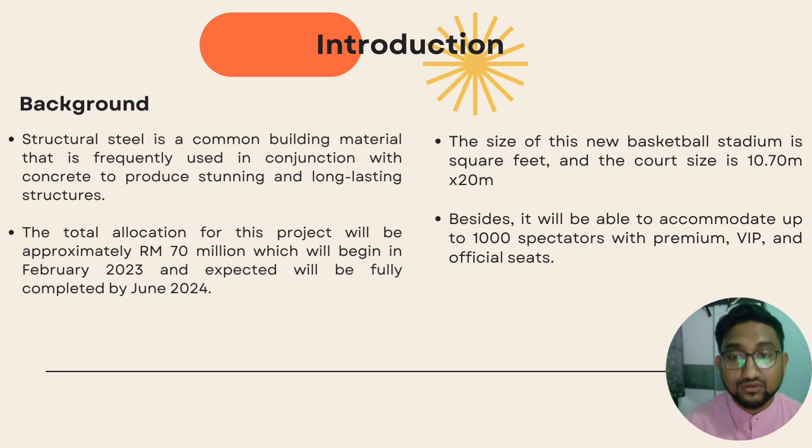The size of this new basketball stadium is in square feet, and the court size is 10.7 meters by 20 meters. It will be able to accommodate up to 1,000 spectators with premium, VIP, and official seating.

For the next slide, this illustrates the proposed design for our basketball stadium, and beside it is the project detail. The project title is Basketball Stadium in Georgetown, Penang, located in Georgetown, Penang.

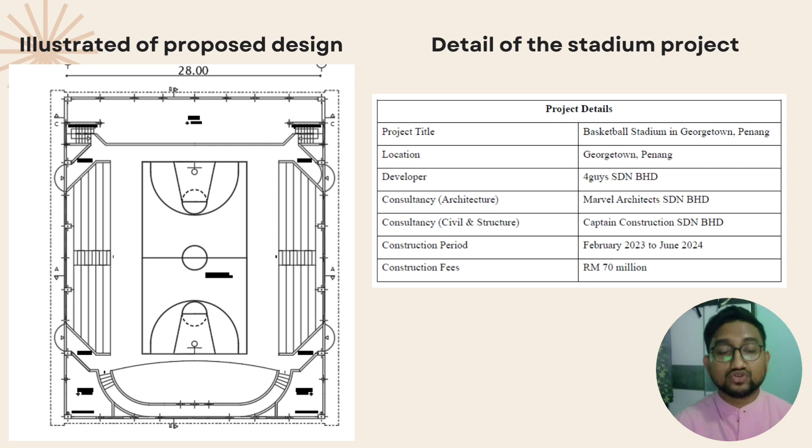The developer is Four Guys Sdn Bhd. Consultancy for architecture is Marvel Architects Sdn Bhd, and consultancy for civil and structure is Captain Construction Sdn Bhd. The construction period will be around February 2023 to June 2024, and the construction fee is 70 million ringgit.

For the truss design, a truss, often known as an open web girder, is a triangulated structure of straight interconnected structural parts. The different pieces are joined together at nodes and are frequently considered formally pinned. A space truss can be determined when contrasted to planar trusses, where the members and nodes are positioned in three dimensions.

For the form of truss, the shape chosen is the Howe truss. A Howe truss is a type of truss bridge made up of chords, vertical and diagonal members, with the vertical members in tension and the diagonal elements in compression. As a result of the longer diagonal members, the Howe truss requires less of the more expensive iron material.

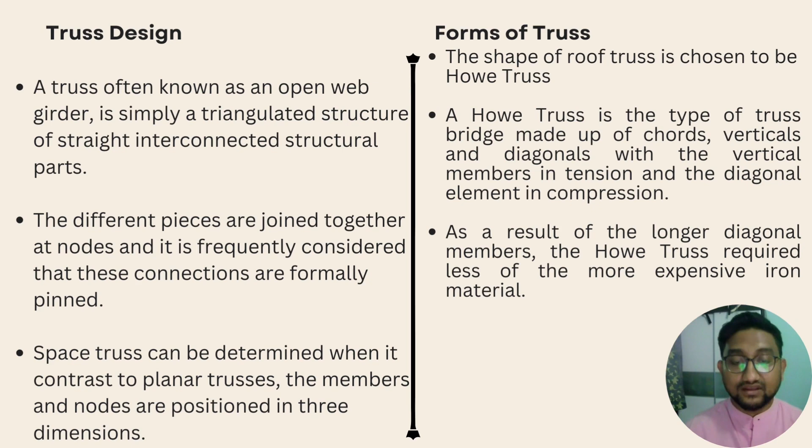For engineering judgment, as for the truss member, two main components are involved: the rafter and the purlin. Rafters are wood beams that incline upward from the ground. Purlin is a horizontal beam or bar used for structural support in building, most commonly below the roof, where purlins are held up by the rafters or the wall of the building.

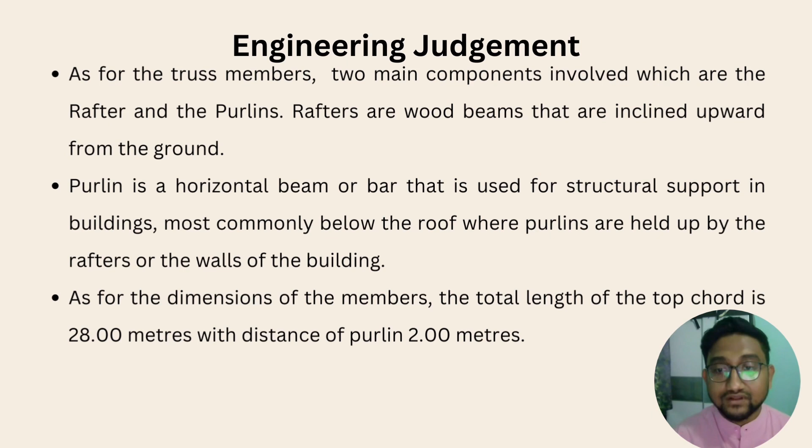As for the dimension of the members, the total length of the top chord is 28 meters, with the distance of purlin being 2 meters. Assalamualaikum, my name is Nalai bin Chandraza, my matrix number is TF200144.

I would like to explain the design overview for Chapter 2 of our project. In this chapter, all the drawings involved are simplified without changing the existing design. This chapter aims to make the designing work easier, and all dimensions and sizes are also shown clearly.

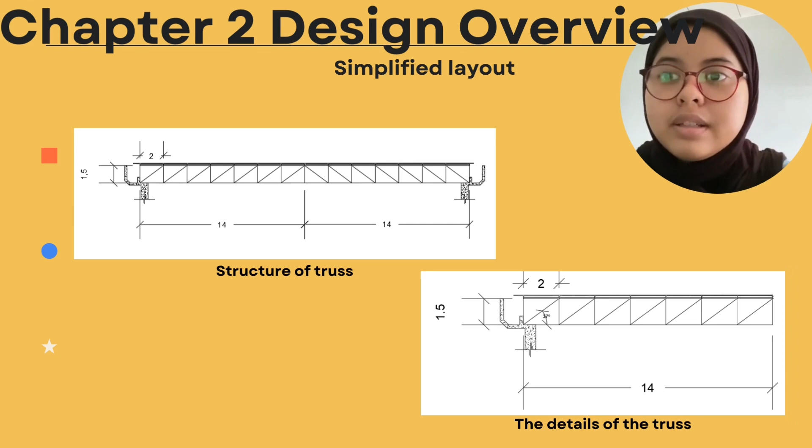For the next slide, I will explain the load computation. The proper computation of load is very critical in the process of constructing a steel stadium to ensure the structural integrity and resilience of the entire stadium.

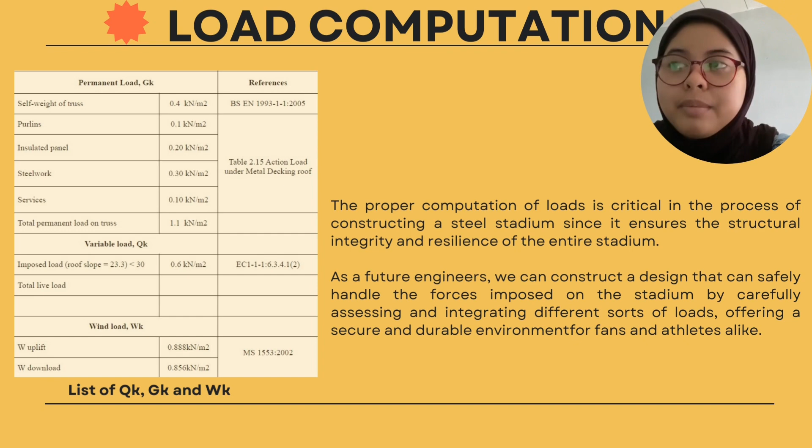As future engineers, we can construct a design that can safely handle the forces imposed on the stadium by carefully assessing and integrating different sorts of loads, offering a secure and durable environment for fans and athletes alike. As you can see on the slide, there is a list of QK, GK, and WK, with references from EC and BS.

Next, I will explain the design wind pressure, which is a simple procedure. Steel is frequently employed in structural engineering for its strength and endurance in the construction of magnificent structures such as skyscrapers and bridges. However, considering the impact of wind on these buildings is critical to ensuring their safety and stability. The design wind load is a very important component in steel design because it helps establish the proper dimension and material required to withstand the wind pressure.

The formula for wind load is shown on the slide, and the Vs is 32.5 meters per second. We choose zone 2 because our building is located in Penang. For the Mz,cat for terrain category C, we get the uplift equal to 0.888 kN per meter square.

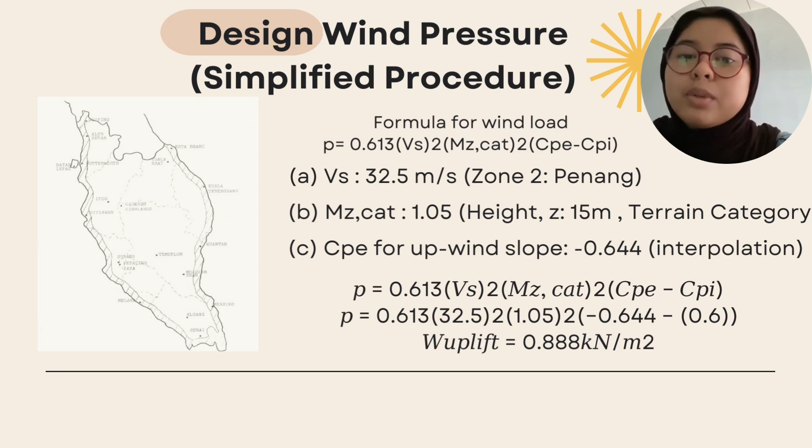For the CPE for downwind slope, negative 0.6, we use interpolation and get the W download equal to 0.856 kN per meter square. I will continue to the load cases.

Load cases are diverse scenarios or conditions that subject a structure to various forms of loads. Wind, snow, earthquake, and even the weight of people and items are examples of loads. Each load case reflects a unique combination of these forces and aids engineers in understanding how the structure will respond in various scenarios.

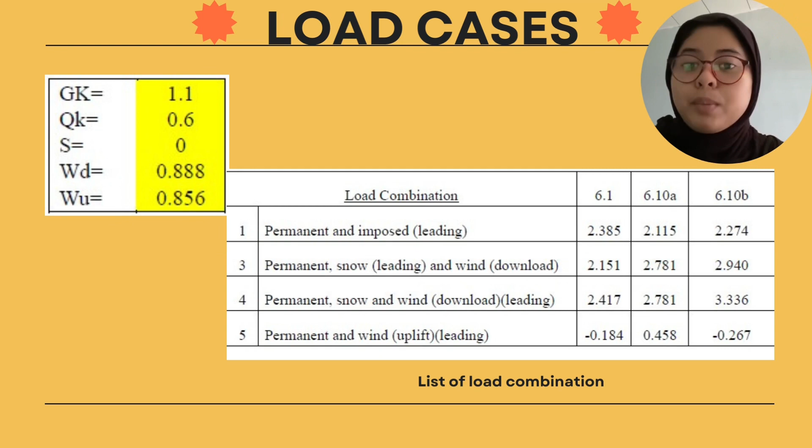As we can see on the slide, we already stated the values of GK, QK, S, W as calculated earlier, and the summary of the load combinations is shown in the table. For 6.10, 6.10A, and 6.10B, there are different types of formulas, which we stated in the table as shown.

Moving on to the choice of truss shape and dimension, we agreed to choose a double Howe truss due to several factors such as cost efficiency, durability, and great weight distribution. Our truss is also cost-effective partly because it is a very simple design with equal angles, making it simple to build and calculate.

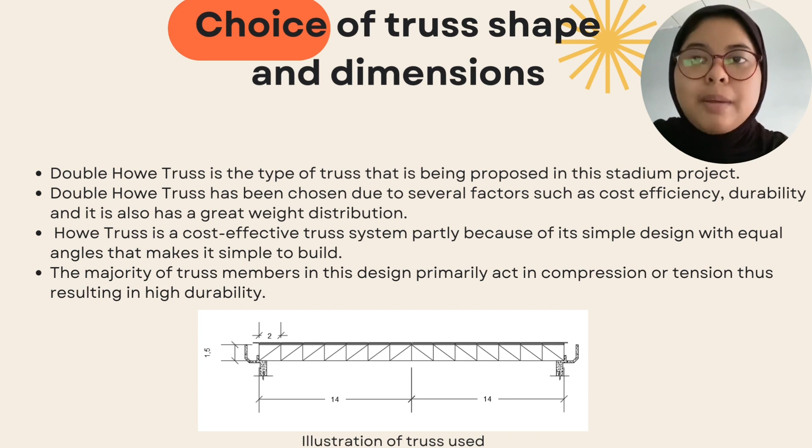The majority of the truss members in the design primarily act in compression or tension, which results in high durability.

The last part I'll talk about is connection type. We decided to choose welding connection because it involves joining parts in which two or more pieces are welded at their contacting surfaces by applying heat or pressure.

As you can see on the slide, these are the welded connections proposed in the project. The welded connection used is direct shear, because it securely holds the structural components together. For joint configuration, welding connections are frequently selected in buildings that demand great strength and durability because they can bear enormous loads and provide long-lasting performance.

That's all for me. Thank you.

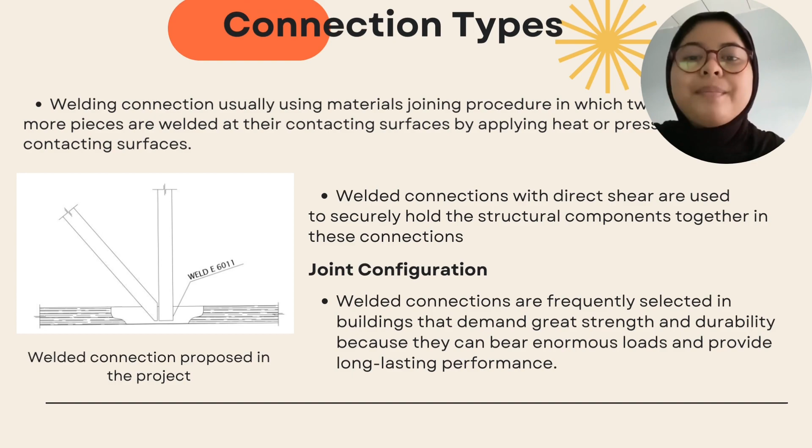Now we will continue the presentation about Chapter 3, which is determination of internal force. For this chapter, we use two methods: the first is hand calculation, and the second is Staad Pro analysis.

So what do we need to do first? First, we need to analyze the load transferred by using hand calculation. After making the calculation, the load data we achieved will also be used for the Staad Pro analysis, and then we will get the internal force for each member in this project.

For the hand calculation, we use the alternative method because we find it easier to use rather than the method of joints, since that method is more complex and tends to produce small mistakes that affect the whole project. The alternative method is more accurate, and I will show you on the next slide. Thank you.

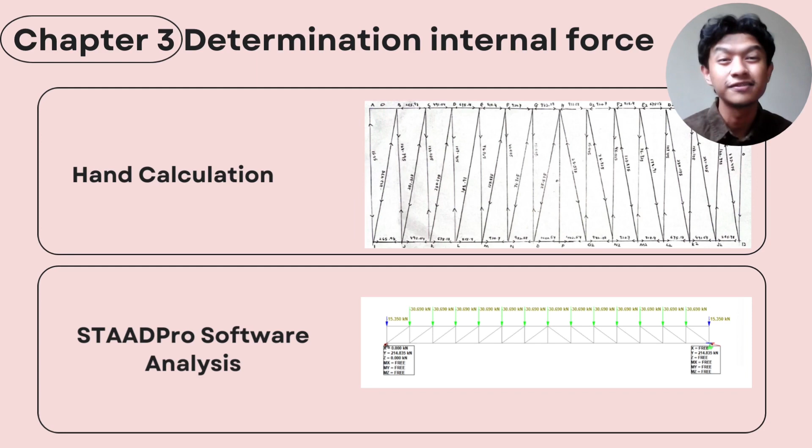After making careful calculations using hand calculation and Staad Pro analysis, we can identify the internal force for each member. We found that the range of difference is only 0% to 8.5%, which means our hand calculation is almost similar to the Staad Pro analysis.

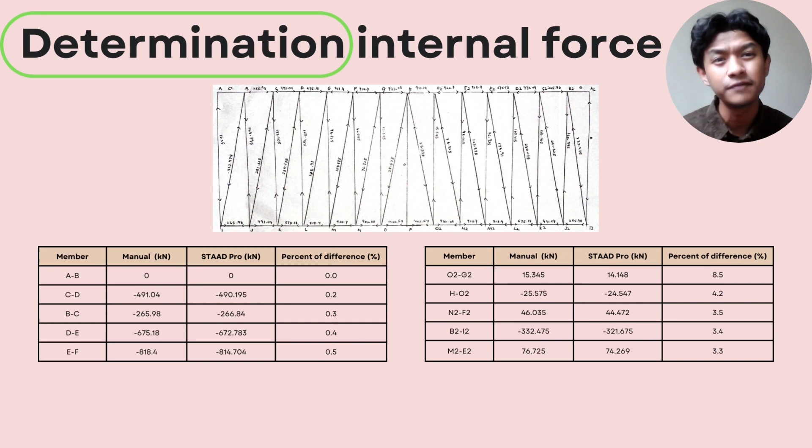The table on the left shows the top 5 lowest percentage differences, from 0% to 0.5%, while the table on the right shows the top 5 highest, from 8.5% to 3.3%. All of these percentage differences are below 10%, which means our calculation is acceptable to proceed to other calculations.

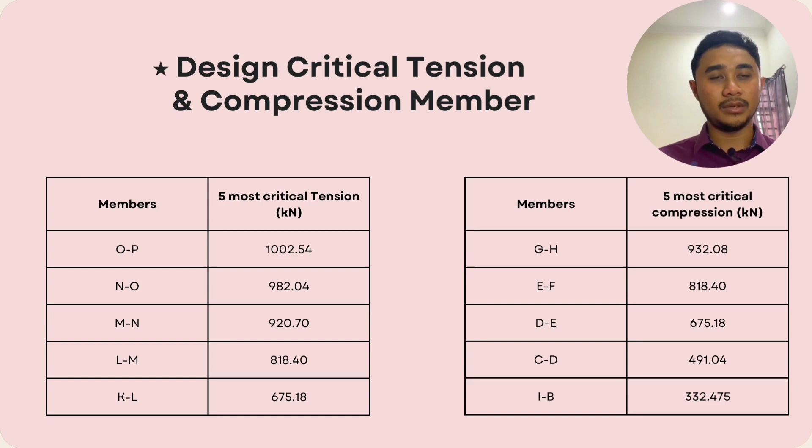This is the example to design the critical tension member. The member we use is NO. First, we calculate the value of area by using the equation NTRD. After getting the answer, we refer to the table of properties and select the suitable size of member, and we decide to use 200 multiply 150 multiply 12.

Next, we calculate the value of NURD and compare it to the value of NED. The answer is less than 1.0, so the design is okay.

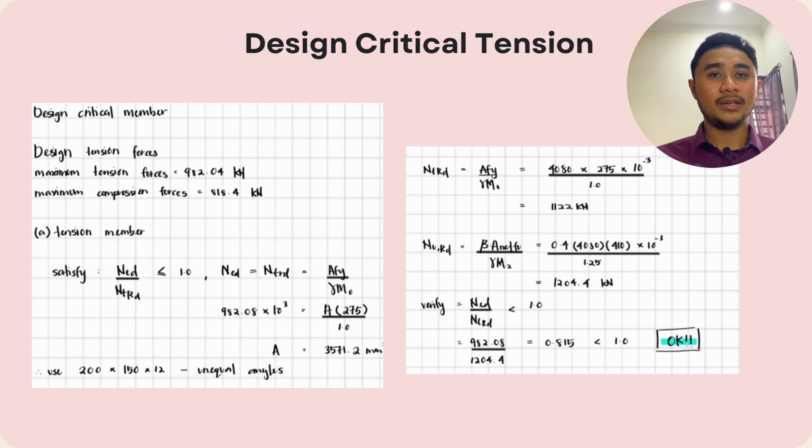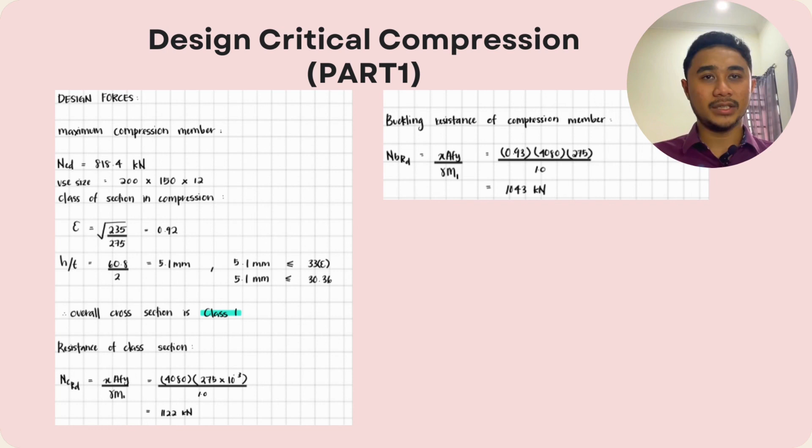Next is the calculation to design the critical compression. First, we calculate the classification and the answer we got is class 1 for the overall cross section. Then the value of design buckling resistance is calculated to compare with NED. This is all the calculation and steps to get the value of design buckling resistance. The final value we got is less than 1.0, so the design is okay to proceed.

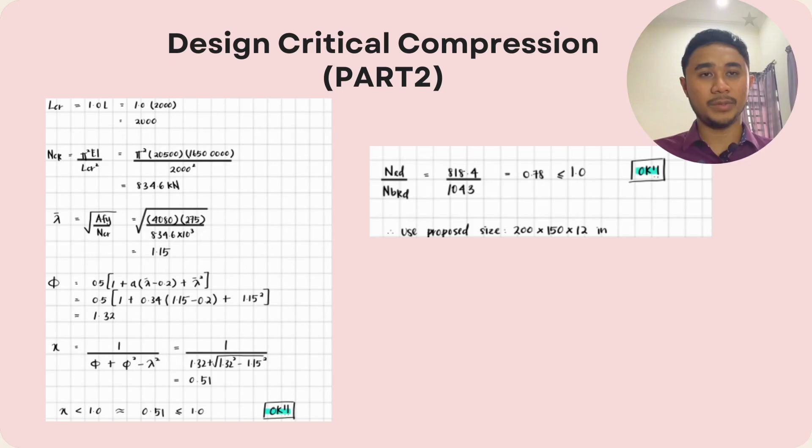We continue to the reflection part. This part will explain the problems we faced and what we achieved in doing this project. The first one is research and selection of design. We encountered some challenges in finding a suitable stadium drawing design. The drawings were either too complicated or lacked sufficient information.

The second is about all the assumptions that we use. We initially faced difficulties in determining the value of the assumptions. However, after asking for help and learning from others, we were able to find out how to determine the assumption values that need to be referred to in EC3 and EC0 and the National Annex.

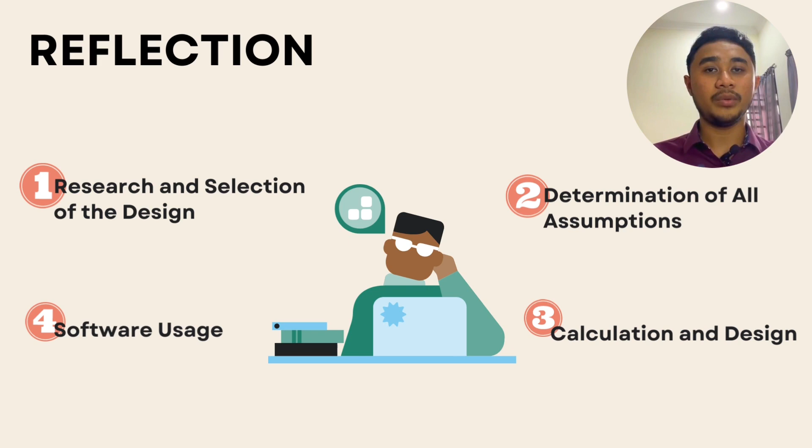The next is calculation and design. Although we faced the challenge of getting the smallest difference value compared to STAADPro, we were able to get values close to STAADPro values. We also successfully divided tasks fairly among group members. And lastly, software usage: we were able to successfully relearn how to use AutoCAD and STAADPro, and we are now able to explore various things in both software.

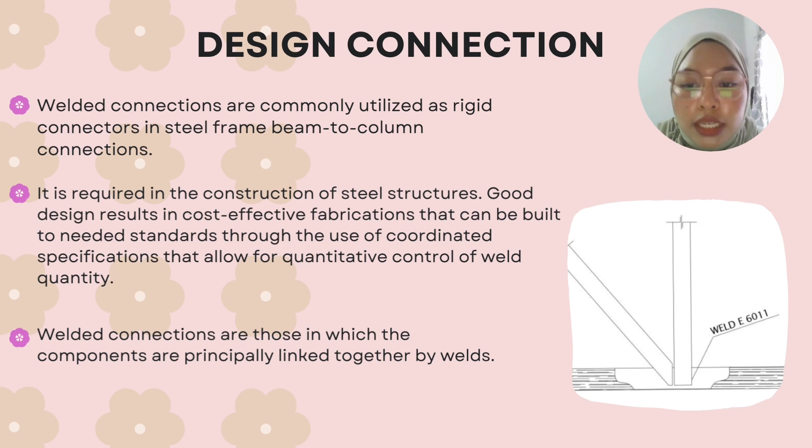Today I will continue the presentation by explaining the design connection. Firstly, welded connections are commonly utilized as rigid connectors in steel frame beam to column connections, so it is required in the construction of steel structures. Good design results in cost-effective fabrications that can be built to needed standards through the use of coordinated specifications that allow for quantitative control of weld quantity. Welded connections are also those in which the components are principally linked together by weld.

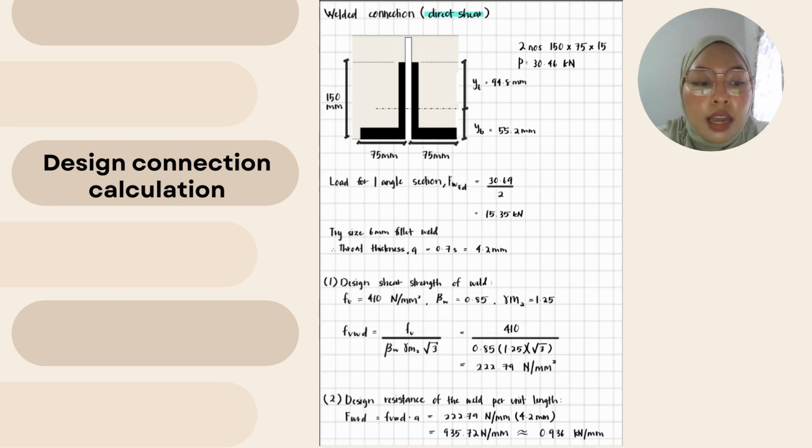Next, I will proceed with the design connection calculation using the direct shear method. The yt is 94.8 millimeter, meanwhile the yb is 55.2 millimeter. The load for one angle section, FWED, is 15.35 kilonewton. The first calculation, the design shear strength of weld FVWD, is 222.79 Newton per millimeter square. Secondly, the design resistance of the weld per unit length is obtained as 935.72 Newton per millimeter, which is 0.936 kilonewton per millimeter.

Proceeding with the next calculation, the minimum length required is 16 millimeter, and the weld length can be arranged in two ways. We chose to balance the weld on each side. The required length is 22.11 millimeter, so we chose 25 millimeter instead. For the other side, the required length is 17.89 millimeter, and we chose 20 millimeter instead. Below is the illustration of our sketch for the welded connections that has been calculated. That's all from me.

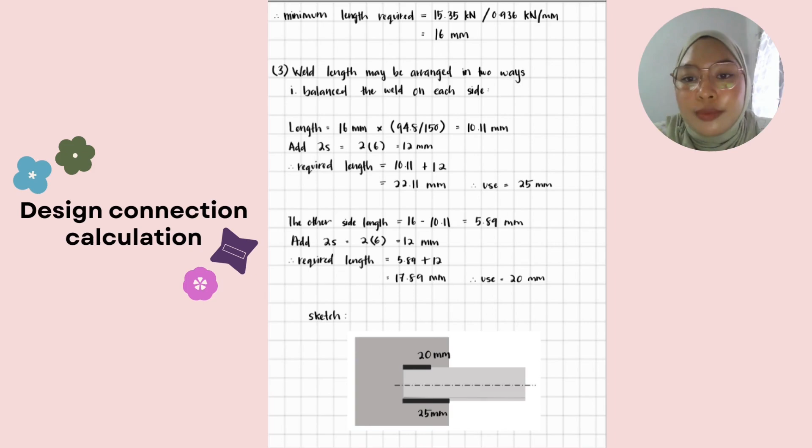Thank you. For the conclusion, this project explored the design and analysis of a steel truss stadium using hand calculation and also STAADPro software analysis to find the internal members of the truss. Secondly, the design of steel truss using equations is very complex and time-consuming, so computer software programs are used to design and analyze these types of trusses. The connection acts as the medium of load transmission from the roof to the column, and by performing this project, our group was able to design a steel structure for the basketball stadium and gain more exposure to real-world engineering situations.

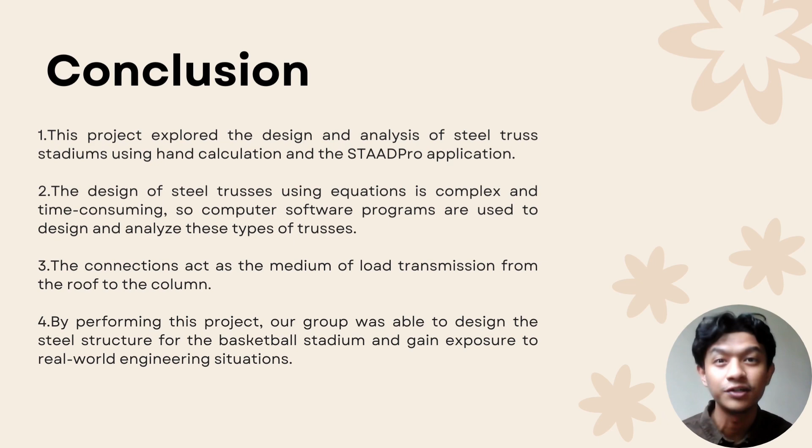For the recommendation, different computer software programs can be used to design and analyze the process for the stadium, such as Midas Civil, RISA 3D, and SkyCiv Structural 3D, to save more time. To be functional, the truss must be cost efficient to install and should not require heavy, expensive equipment or extensive preparation. Steel trusses must be strong, and they might be more cost effective than beams for long spans. Economical stadium design is also important to maintain the existing stadium design and save costs of repairs and restoration work in the future.